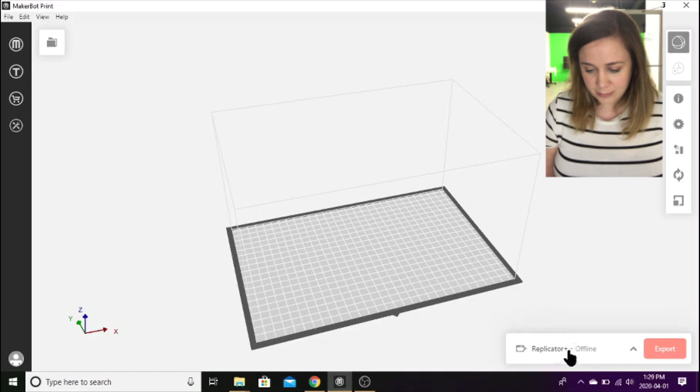I'm going to open up my MakerBot Print. Up here in the corner you can see its name, and this is where my virtual play field of the exact print bed size that I have appears. Replicator Plus is the model I have, and I'm going to go up to this project panel here, add model, and go to downloads and find my one. So here's a Replicator spool holder version 2, the STL.

STL is just a file extension for a 3D model. So when you see these red lines here, it's telling me there's overhang. It's not going to be able to print properly.

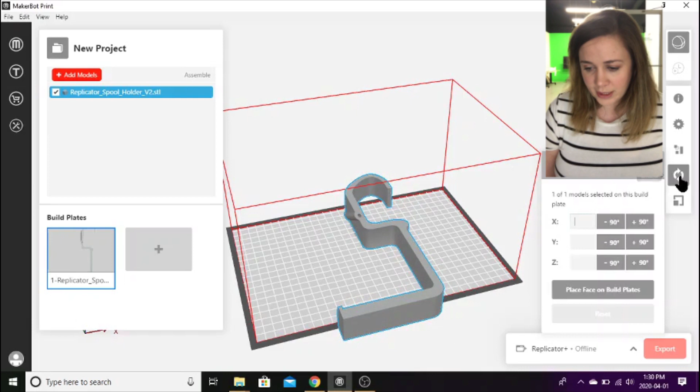So what I need to do is click on the object. I know it is selected if this is highlighted in that blue background, as well as my object having that blue surround. I'm just going to click until I get my arm laying the way I need it to. Now all the margins are within the print bed. You can see that this red line has disappeared and it's a little bit happier with me. I'm going to unclick that just to get out of my field of view.

And now I am going to do our slicer settings. Balanced, this is a fast overview. I'm going to go to custom settings and walk through everything. Now your bread and butter, 90% of everything you want, is in quick settings.

Base layer, this is the part that touches the print to the print bed. Ours is not heated and a raft really is advised. There's other options, but I've not had much success with these in the final look and edges of ours, so the raft it is.

Layer height, the automatic is 0.2 millimeters thickness. This will give a nice overall finish. You want lower layer height if you want a smoother, more polished result, and higher, up to what your extruder can handle, will give you just a more draft quick version. So depending on what the purpose of your print is, you just need to change it. I'm happy with 0.2, I'm going to leave it alone.

Infill density, this is how filled in your project is. I need some strength, so I'm going to bump that up to 15%.

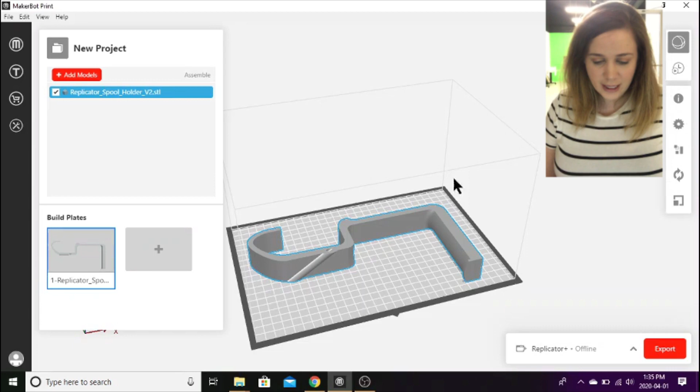I'm confident and happy with all my selections, so I'm going to hit done. Now I'm just going to click off this wheel to get it out of my field of view, same with my little project panel here.

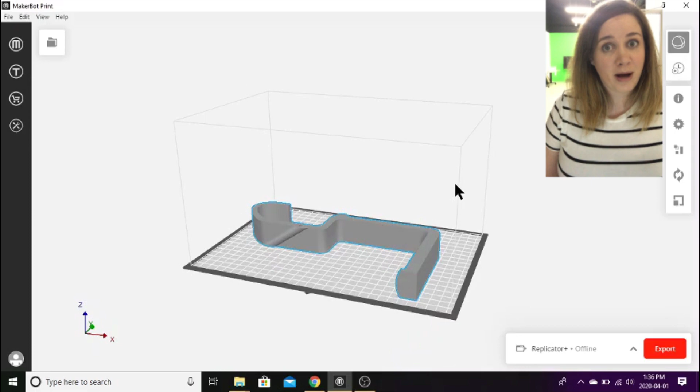I can right click and hold down to see that there's no overhang. This is a really good option if you have multiple projects, to make sure they're not overlapping, because they will print overlapping. As an example, one time I printed astronauts, and two of them were too close, so I had astronauts holding hands.

Now this second button down, the time estimate, has a clock with a little play button. This is going to tell me how long my print will take. Depending on the time, I might make some adjustments, but I think we should be pretty good. Let's see.

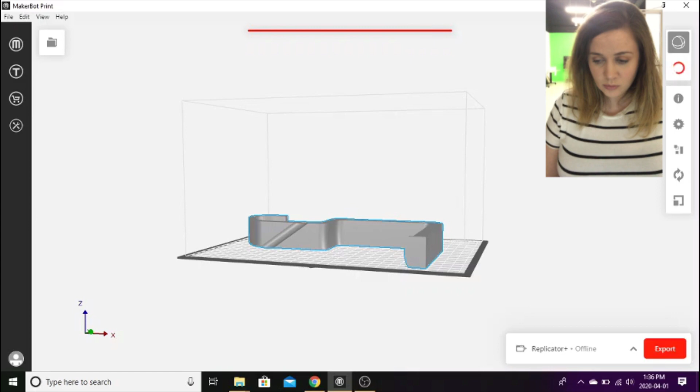There's a little bit of a wait. That's fine, working away. Getting it ready. My field of view will change a little bit.

So now we're no longer in the model view, we're in the time estimate view. It's going to use 69.2 grams of PLA, and it's going to take 2 hours and 17 minutes. If I started my print now, at the current time which is 1:37, it will be done at 4:54. Some good information to have.

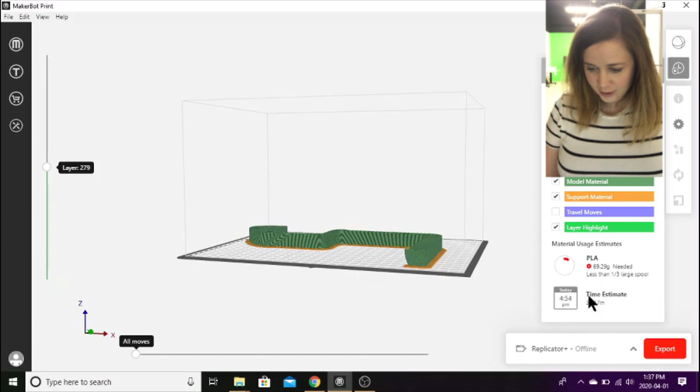I'm going to see if I can maybe tweak things a little bit to get that time down, but let's look at the model. If I right click, I can see it and move it at different angles. This orange here is our raft, the part that's going to secure it to the print bed.

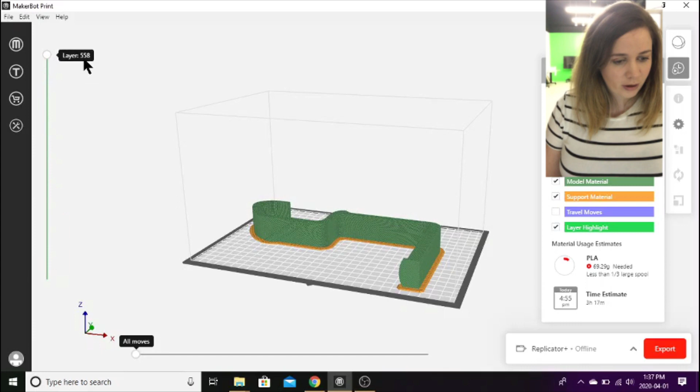Our printers are only smart enough to know where it should print, not where our model might have moved. So this is a really important part of 3D printing in our case with a MakerBot that does not have a heated bed. On this left panel here, I can see my layers. In total, our arm has 558 layers.

I'm going to go back to my model view and change some settings. Anytime you change a setting, you'll have to do another time estimate, because even if I just move it a little bit on our build plate, you'll see it went from red to gray. It changes everything.

So let's go to print settings, custom settings, and see what I can do about my base layer, my raft. Let's find where I want here. Offset from the model edge - this is the difference between where the model ends, the very edge of the model, and the edge of the raft. I'm going to decrease this to 2 from 4.

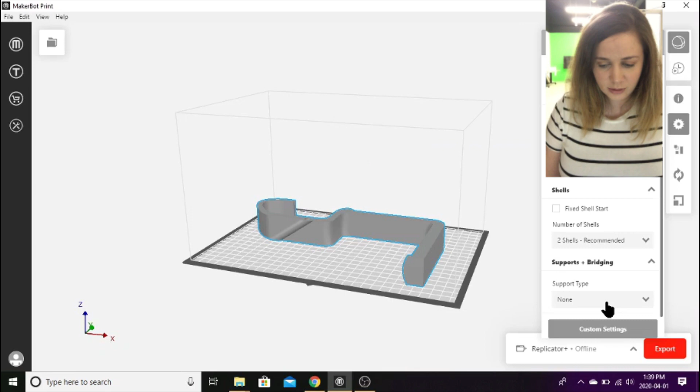And I'm going to change my infill density back to 10. Won't change the strength of it. The most strength actually comes from the shell, not the infill. So infill is an important part, but shell will give you the strength if you're looking for something really sturdy and durable. All right, let's do another time estimate to see if those little tweaks do anything significant or not.

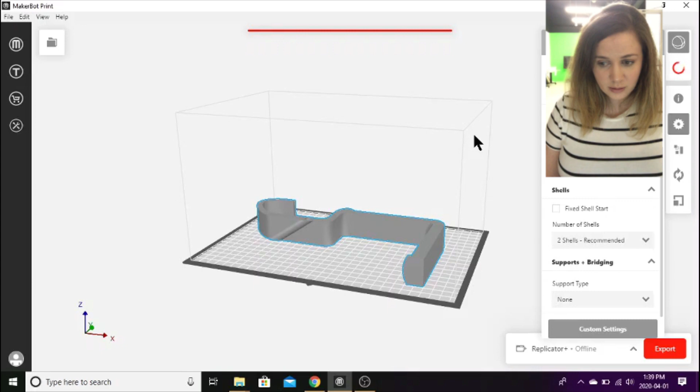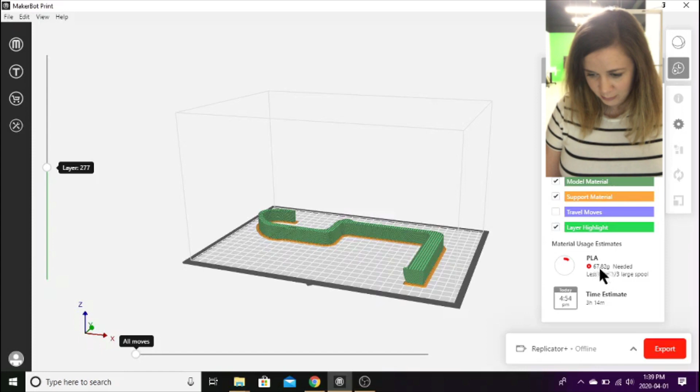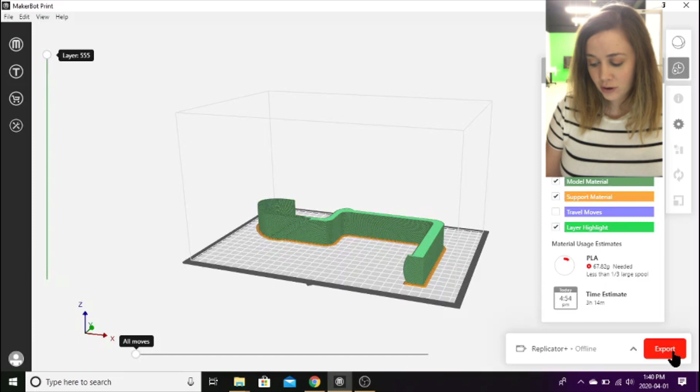All right, so now if I want to get this prepared and put it in my MakerBot, I have a few options. I can send it directly over Wi-Fi. I can put it on a USB stick, or I can hook up with a USB cord right to the MakerBot. Right now, I'm going to export this.

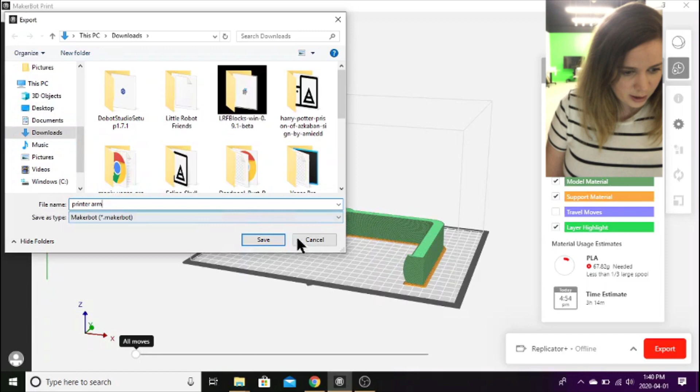Let's give it a name - I'll call it printer arm. And I will save it right into my downloads, I know where it is. Okay, save. Wonderful. So there we have our file extension if we need it, and it lets us know that we successfully saved it.

A really important part, because sometimes you pull out your stick too fast and it has not saved. So we are ready to go.